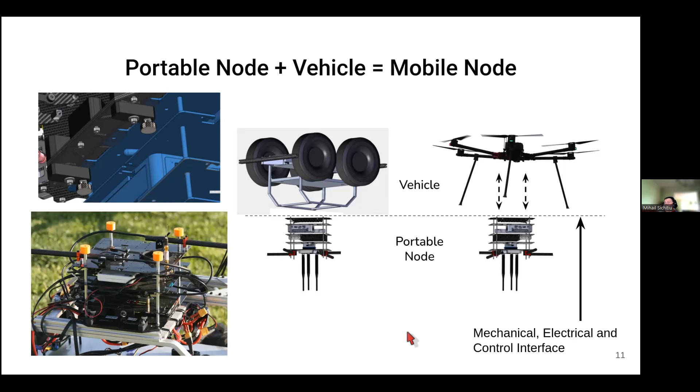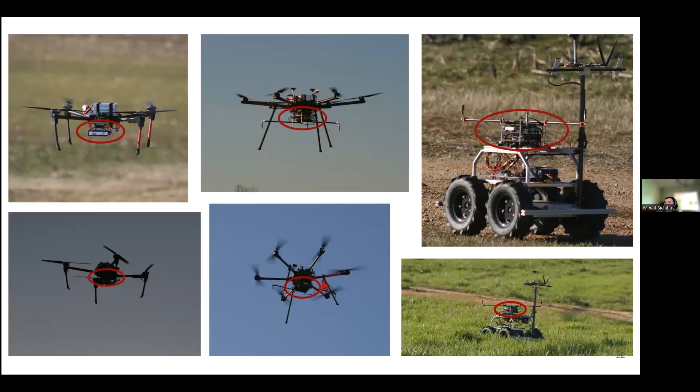It also goes on a vehicle — a full-size car that we go around with — and on a cart that we do experiments with, all using our portable nodes interchangeably, because we defined a very clear mechanical, electrical, and control interface between them. So here you see a sample of our vehicles — these are our portable nodes mounted on these various vehicles at different times.

The portable nodes, especially the large portable nodes, also have a modular design. They're organized in plates which are really easy to interchange. There's a single butterfly nut — that's what a wing nut is called in English, sorry — that can be easily unscrewed, and then any of these plates can be changed.

So we can use the same computer with different radios, or the same radio with different contents, or we can exchange the antennas — if you want directional antennas or to change the polarity of the antenna, it's really easy. At the base there's a power plate that provides all the voltages, filtered, to the entire rest of the node: 19 volts, 12 volts, and 5 volts.

Available throughout the node, the computer is a pretty powerful one — a laptop-class computer, an Intel i7 with 64 gigs of RAM and a 2 terabyte SSD. So it's powerful, but that's what's needed to drive these radios. It's also heavy — that's why our big drones are big, to be able to lift this. Let me see if there are any questions on the portable node... I don't see any.

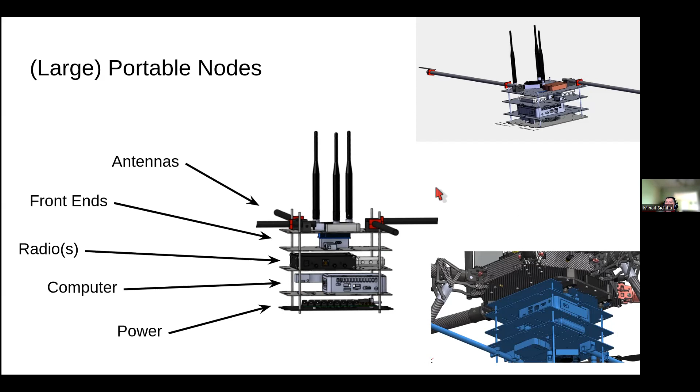So then I will go ahead and start to describe our thought process on choosing a drone solution to satisfy our requirements. So here are the requirements.

The first thing we were advised to do, and we're still asked all the time, is why on earth did you build your own drones and didn't use a DJI drone? There are so many other research groups that just use the Matrice 600 to do things similar to what we're doing.

Honestly, in terms of hardware, the Matrice 600 is not quite exactly what we need, but it's close. Our payload requirement is 3 to 10 kilograms. The Matrice 600 flies up to 6 kilograms. For most of our needs that would be okay, not great, but okay. Endurance is not quite there - it's 35 minutes without payload, 16 minutes with 6 kilograms probably on the order of 20, 25 minutes.

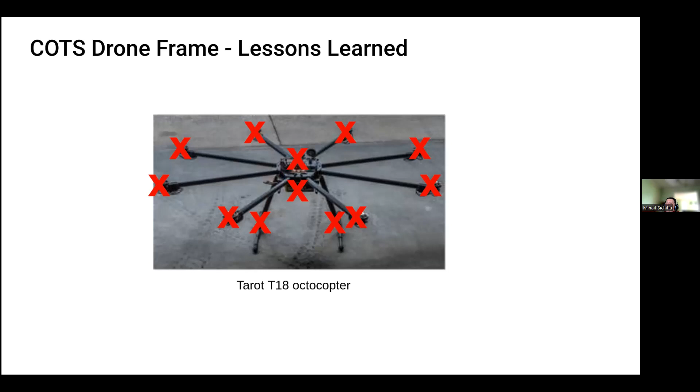And then we looked at the drone and it's like, what did we actually use out of that original frame? It turns out the only thing that was still active was the arms, the tubes. So we started asking, is that even worth paying any money for this frame? And to answer our question, Tarot discontinued the frame. It's like, alright, so that's not a question anymore. So what happened is it just didn't work out for us.

So what we did is we simply designed from scratch in SolidWorks, screw by screw, over 1,000 parts - a large hexcopter that has a max takeoff weight of 30 kilograms and has over 75 kilograms of thrust. That's what determines the max takeoff weight. Of course, since we're flying under Part 107, we keep it under 25 kilograms, but the propulsion system can handle more than that.

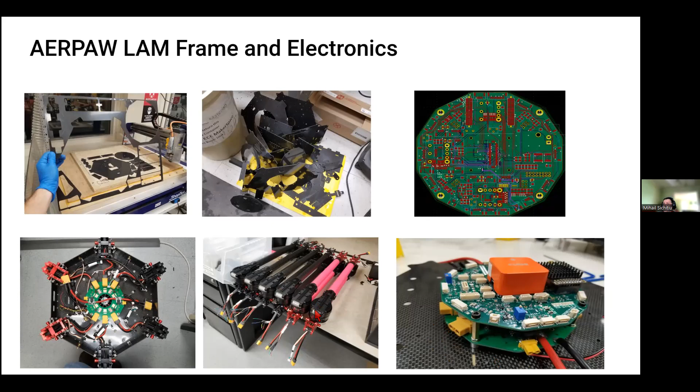We also designed a two PCB solution. The top one is the control side, the bottom one is power distribution and control. The connectors you see here each go to a motor and ESC mounted at the tip of the arms. And this is how it's in flight.

We currently have 3 of these working. The 4th one is being assembled, and we're working at variants. In particular, we're looking at a heavy lift. For that, we will need an FAA exemption, but our administrator taking care of that said that should not be a problem for us.

So this is our hardware solution for the drone question, so to speak. This is how we test it.

We have a test stand with blocks. Out of the 6 degrees of freedom that the drone normally has, this preserves 4 - so it's all rotation. You can have your pitch and roll, and it also goes up and down. It's just X and Y that's restricted.

The reason we do that is because every time we mess up with the drone, we open it up, we change the propeller, we change the motor, we build a new drone, we want to test it here first to make sure if something is wrong. And at some point, something was wrong - on our second drone, one of the motors wasn't working, and we were so happy that we discovered that on the test stand rather than in flight.

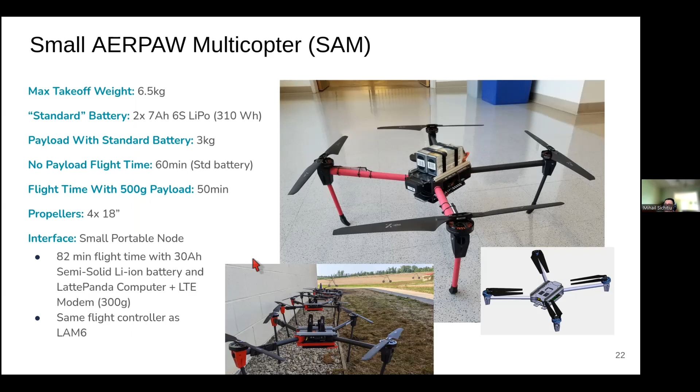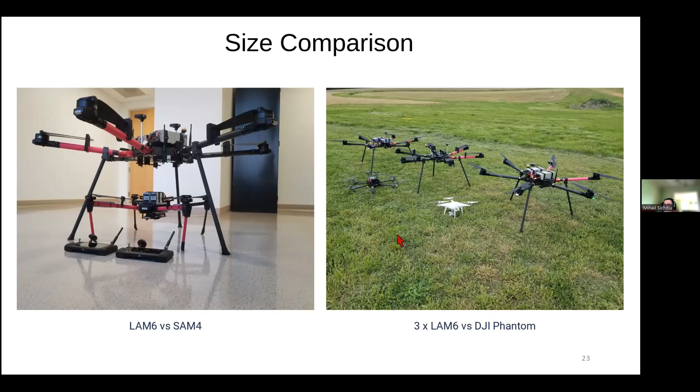We also have a working rover that has 120 minutes endurance, so it can drive for 2 hours. Of course, if it sits, it can sit for days. One of these large batteries can power a portable node for 2-3 days, depending on what it does.

This works great as long as the ground is relatively level. If it's grass or road, everything is okay. As soon as we try to take it on a plowed field, this shakes quite badly because it has no suspension. So for this reason, our second rover that we're working on now is considerably bigger, and it's really designed to work on the fields.

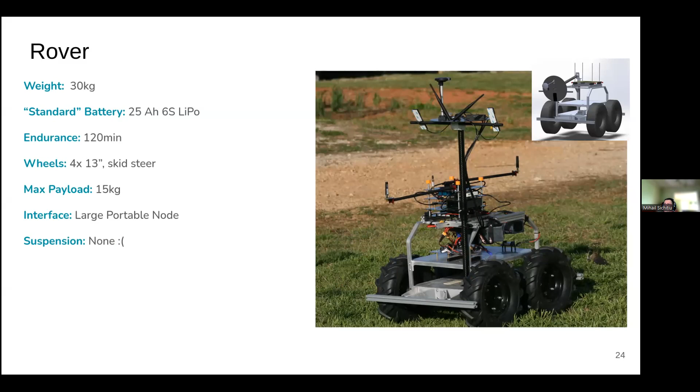We'll continue to keep this one for smooth surfaces, but our second one is going to be the one that can cross the field at speed in any direction. And this is in its natural element. We are doing some tests to see how it comes back to where it goes. So let me see if there are any questions regarding our hardware.

And I don't see any. So we're going to jump in our software. And what I want to

Explain our main problem is, remember, we said programmable radios and programmable vehicles. The question is, how do you program a vehicle? The key ingredient here is the you. Who is the you? This platform we're building is open for experimenters. So experimenters can come to our platform, not physically, virtually. They log in and can tell our drones what to do.

So there's going to be experimental code running on that portable node that tells the drone what to do. How can an experimenter do this? We look at all our other test beds, and they give experimenters live access to the test bed. That means an experimenter gets scheduled for Monday morning between 9 and 11 o'clock, and you can log in on these nodes, write your code and test it, and everything is fine. We cannot do that. We cannot have drones in the air while experimenters write and test their code. That's completely unacceptable. Not even if the drone is on the ground, it's still unacceptable.

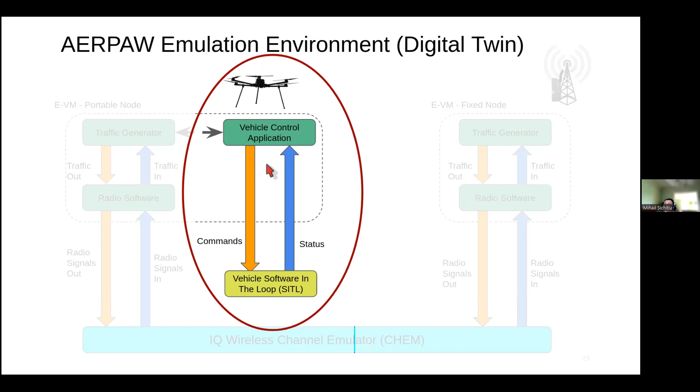So this is what I will focus on. Today there's an entirely different story on how we emulated the wireless transmission, which is a very interesting story as well—I'm in charge of that too. But today we'll focus on the software solution: how exactly do you program drones in the digital twin and move them out to the field with the same software. Here is a zoom in on that particular part.

There's going to be another zoom in on the top, but let me explain how this works. On the test bed, you have a vehicle down here at the bottom, which is a frame—just motors, with PWM controlling the speed of the motors. Then you have an autopilot, for us a Pixhawk-compliant orange cube. And then we have the software that runs on the computer on the portable node—I'm showing here the Intel NUC, part of the portable node—that talks via a USB cable to the autopilot, telling it what to do, and the autopilot commands the drone to make it happen.

So this is what happens, and there is vehicle software that allows this to happen. In the digital twin, we have everything the same up to the frame. Essentially, we still have the same control software for the vehicle, including the MAVLink filter. I'm going to talk about the MAVLink filter, and I'll talk about each of these blocks.

And then we have the autopilot firmware—exactly the same code that runs on our autopilot hardware runs in an autopilot emulator. This is identical one-to-one. We make sure it has the same version of firmware so we don't have surprises. Finally, instead of the real frame, we have a vehicle physics simulator that responds to commands from the autopilot and feeds it simulated sensors so the autopilot can do its job.

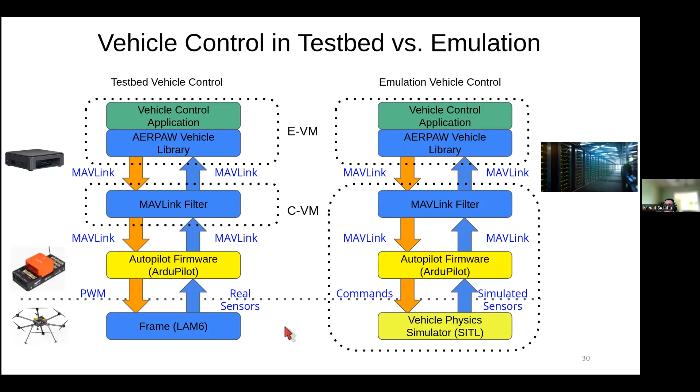The first thing I said I'm going to explain is what's the deal with the MAVLink filter, and let me explain what that is and what its purpose in life is. Our experimenters have access, not only access, they have root access. They can change anything they want in this container. This is called the experimental virtual machine, experimental container. All the software they write is here, and we encourage them to write it on top of this software stack, but we do not force them to do that.

They can do whatever they want in terms of programming the drone, as long as they speak standard Mavlink here. Now, Mavlink, if you're not familiar with it, it's a micro air vehicle link. It's a pretty common standard for communicating with vehicles. It has usually two different sets of links. One of them is commands going towards the autopilot, and then there is status, so you know where the drone is, what it's doing, what is the current speed, what's the level of the battery, and other things. And Mavlink is super powerful.

It's in fact so powerful that it's scary, meaning it has commands that allow an experimenter, for example, to stop all the motors in midair. They can take a drone 100 meters up, and then they can command all motors off. And it's going to do it, and it's going to crash mightily.

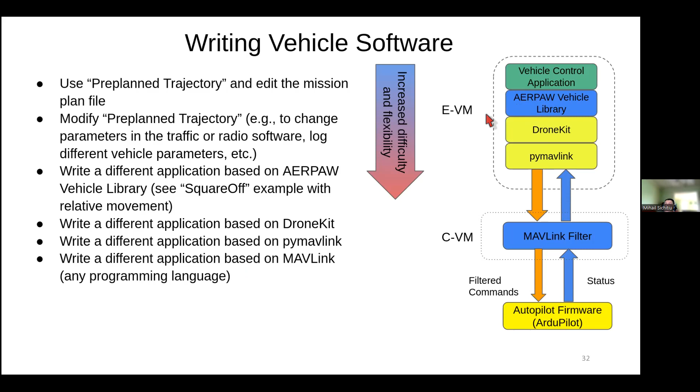So the way AERPAWLib works: this is a library we developed from scratch. I mentioned John Kessler, it's one of his babies. He did a wonderful job defining a finite state machine.

AERPAWLib makes this really easy, I think, because you have each state, as long as you can plan your execution as a series of states, and each state can lead into another or potentially different ones. So it sees the next waypoint, if it exists it goes in transit; if it doesn't exist, it goes to the RTL state.

AERPAWLib also has support for coordinating multiple vehicle movement. You can have swarming, in which multiple vehicles synchronize their moves, offering synchronization points and primitives for exchanging data between vehicles, so one can decide something and communicate to all the others, and they all execute. It provides support for safe autonomous drone movement.

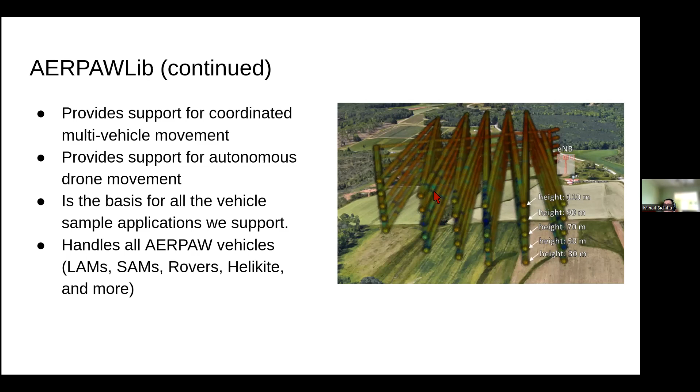These are our sample applications, and by far our most popular application is the pre-planned trajectory, the workhorse. This is whenever you want to go there, do something, go there, do something — this is the easiest way to do it.

It allows users to have GUI definitions — essentially they use QGroundControl, which is point and click for plan files, and allows users to pause at waypoints for however long they want, change speed from waypoint to waypoint, change the overall yaw, or keep the yaw fixed throughout the flight. And it has software hooks for things to do while in transit or at waypoints, or both.

We also have a pretty popular GPS logger, which doesn't control the vehicle. This is what we use when we have a cart that a student pushes, or a vehicle that somebody else drives, or our helikite that goes wherever the wind blows it. The GPS logger then logs all the pitch, yaw, roll, azimuth, and position.

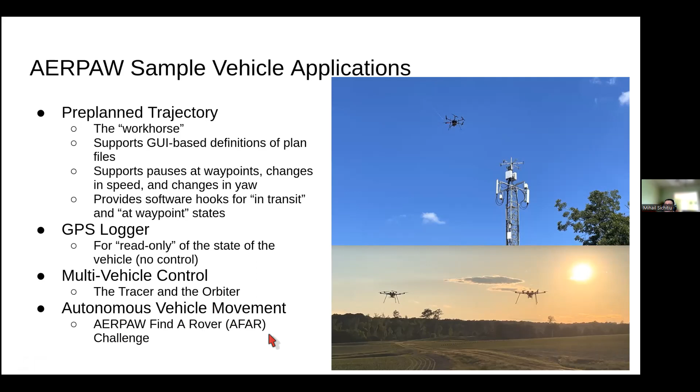Finally, we have a sample for autonomous vehicle movement, which we're using for our AERPAW Find A Rover challenge, in which we hide a rover in the field, and competitors try to use a drone to find the rover either as fast or as accurate as possible. That's the basis they build on with this sample application.

And finally, if you've had anything to do with autonomous drones, you're probably familiar with QGroundControl. This is what we offer both to our experimenters as well as for ourselves — we use it in the field.

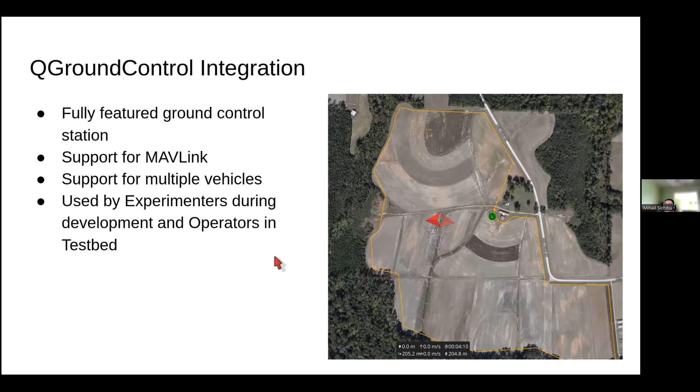Our safety pilots use it, our operators use it. And it's a great control station, has support for multiple vehicles for MAVLink. It has versions that run on tablets and phones and controllers.

And I see Kamesh is blinking at me, so I think I will finish. This is the last slide, Kamesh.

I wanted to point out that a lot of what we're doing is to increase the safety of our operations. It starts from the hardware, in which we have more propellers than we need and more thrust to weight ratio than we really need. We have multiple sensors for everything, separate control links, RC controlling and cellular on different frequencies. This is on purpose because it's quite possible for our experimenters to jam one of the links, but we think it's impossible to jam both of them. We have different power sources and different antenna diversity. Now we fly with all arm checks and fail safes, and a lot of software was written just for making sure that everything is safe, starting with the emulator itself and the MAVLink filter that restricts what can happen.

We recently installed an ADS-B alert system that is watching for incoming aircraft, because it happened more than once to have helicopters flying way too low over our field, and we want to have a heads up when that happens. We fly under Part 107 rules, and we have excellent trained safety pilots.

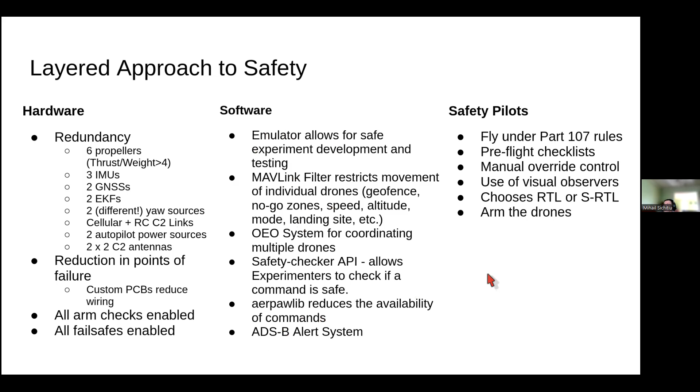And as promised, that was the last slide. So now I think it's a good time for questions. I do have the chat open, so if you do have any questions, do not hesitate to ask.

Thank you, Professor Sichitiu, for a wonderful presentation. This is a pretty unique project or platform, and I believe for those attending now, if it's their first time listening to this platform, it takes a bit of time to understand and then engage in this activity. But I think it's a great opportunity, especially for students, to look at this platform and see what it offers, as much as you learned today in this presentation. Please follow up if you are interested in doing any projects on this platform. I think this is definitely a great opportunity for students to engage in research. It's not only students, it's also researchers, and not only at universities, but also in the industry. We welcome all. Everybody is welcome to our platform, and as I said at the beginning, it was the intention of NSF to be a place where both industry and universities come together and bridge that divide.

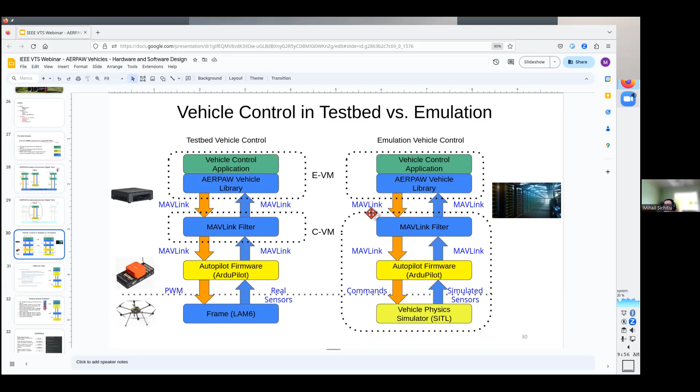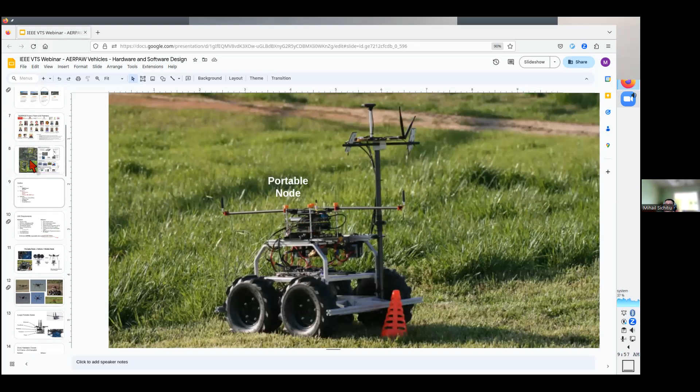This is the rover, and we have a node with a custom waveform that gets transmitted at one of our fields. Let me see if I have a picture of our field here. So we go and hide it over here, and then the participants, the competitors, have their software control the drone which has a radio receiver exclusively. They do not control what our rover does, either radio-wise or movement-wise. The competitors can control what the drone does, both movement and radio, and their job, based on the signal strength received at the drone, is to find their best estimate for the rover's location.

In particular, we have two timeframes. We have a fast estimate, which is 3 minutes - give us your best guess in 3 minutes. And then we have a second one after 10 minutes, where you can scan a lot of our field at 10 meters per second. Then they give us their best estimate. At the end, we'll award two different prizes: one for the best fast estimate, and one for the best accurate, slow estimate. Possibly to the same team if they end up winning both - we don't mind. But this is what the challenge is about.

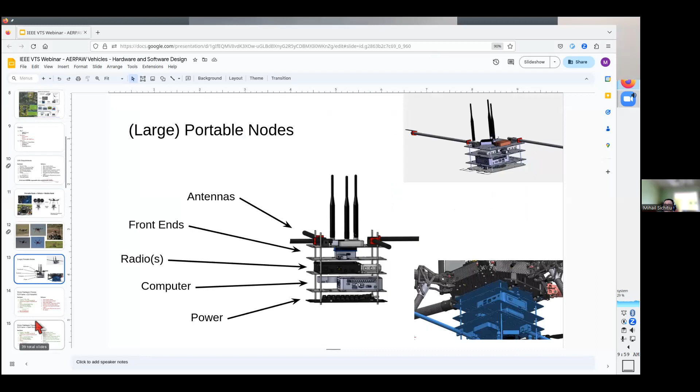It's just that we didn't find a good reason to do it. The only thing that happens quite regularly is in the evening, we don't quite finish our experiments, so during civil twilight we just wrap things up. But so far we've never intentionally flown starting at night. We really don't need a different drone - we just need permission from FAA to do it, and a good reason. I think those are the two things.

That question was from Madan Pandey. Now I don't see any more questions, so we'll try to wrap it up.